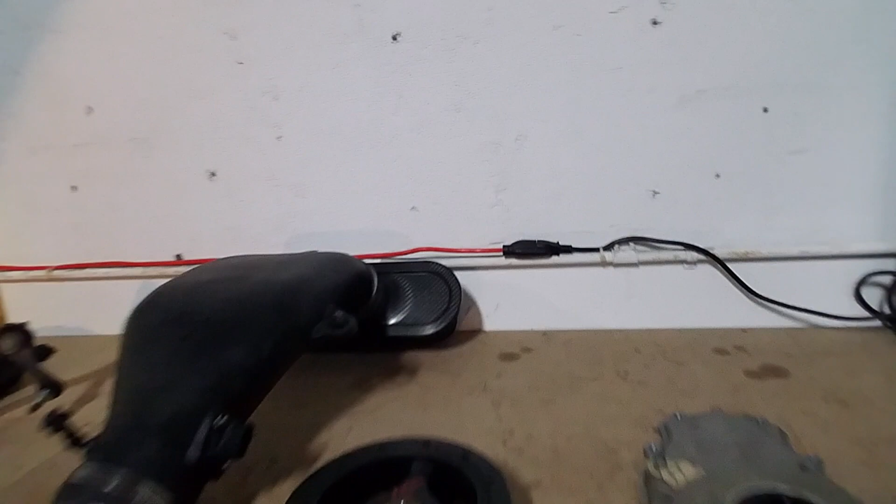I don't know how far I'm going to get. I mean, probably going to be at least a couple hours to get all this stuff back together. We'll kind of see as I'm getting tired. I don't want to force the project and mess something up and get sloppy, so I might just do a little work tonight and then come back tomorrow after work and finish everything up. So let's go ahead and get started.

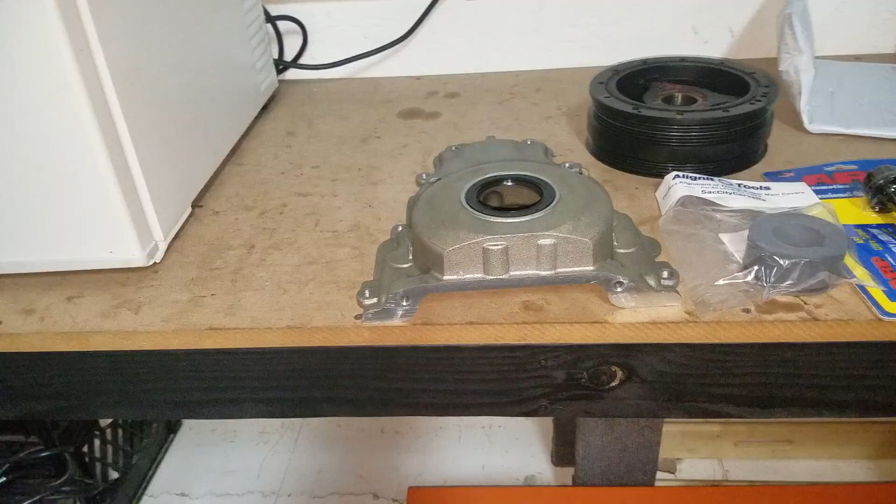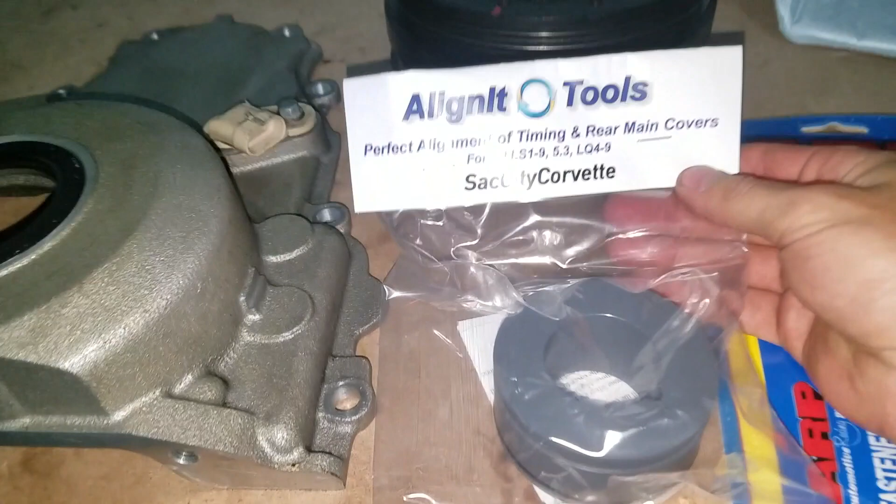Alright, so here's all the parts basically we need for the job. We got a new seal, we got an ARP bolt, and we got the alignment tool. I got some questions about where I got this, so here's the name of it and where it came from. And basically this is going to go onto the crank snout, and then I'm going to put the timing

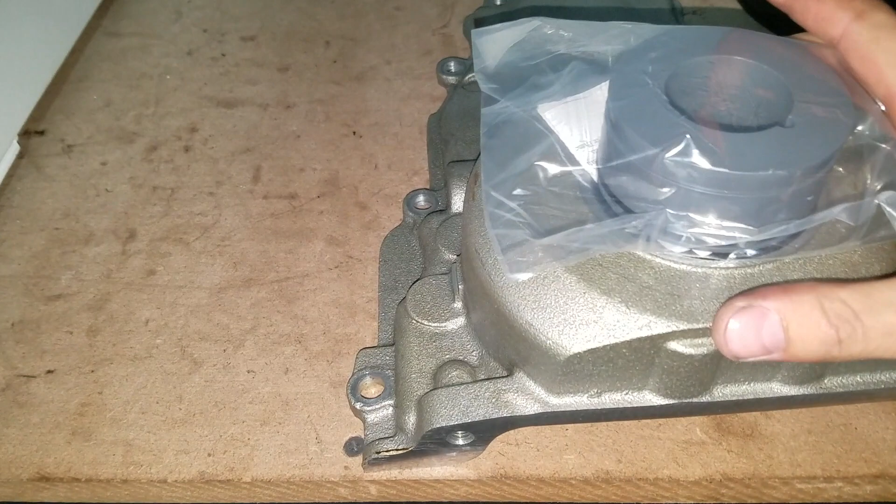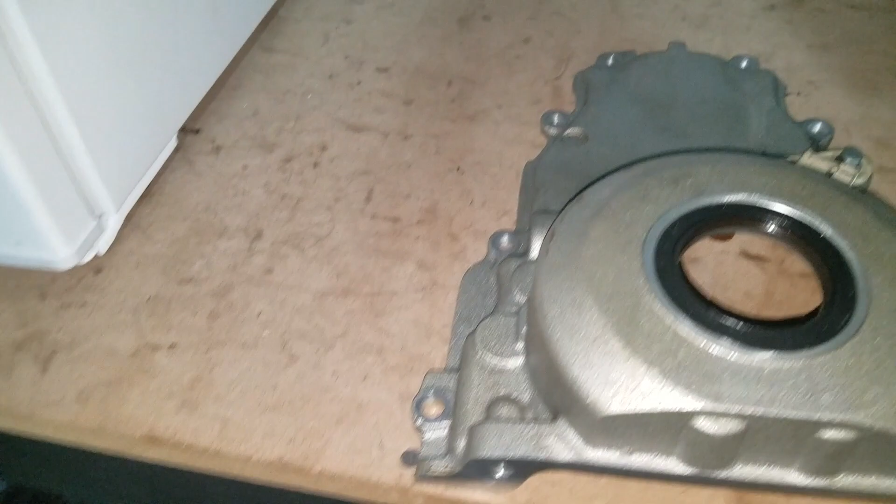cover on, and that's going to center this relative to the crank position, and then tighten these bolts down, torque it, and then that will be set centered, so then when we bolt the balancer up, it's going to drop right in and be centered on the seal. So that's the trick with that.

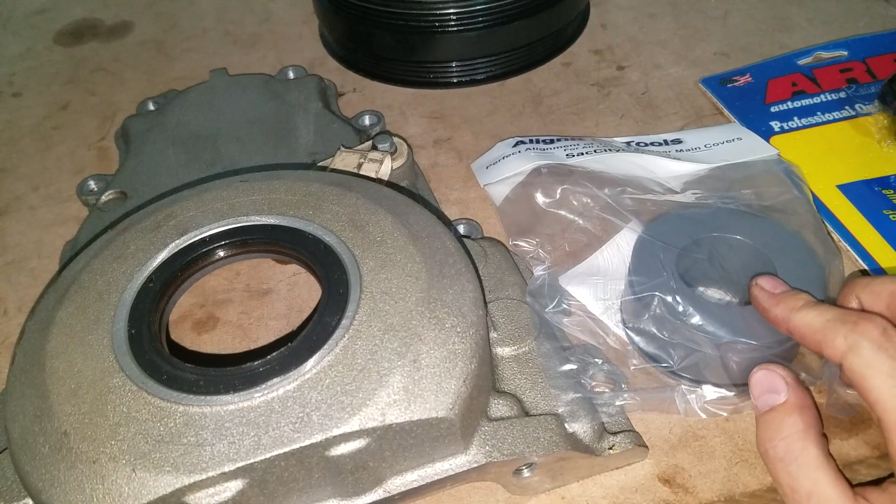Obviously I didn't do that last time. I just thought the bolt holes were close enough on alignment and it would kind of center itself as resting on the oil pan, but obviously that's not the case with these LS motors. You got to be real critical of your tolerances and how you put this together. So this is definitely the tool for the trade here, and you want to make sure you got this prior to doing a front main seal on one of these cars.

And then the other thing too is, before you take this apart, you want to make sure you mark your balancer if you're going to be reusing it. This balancer should be fine. It only has like 20,000 miles on it, so I don't see any need to replace it, and I hope I don't regret that decision. But anyway, so this is marked on the crank snout, and then the alignment here.

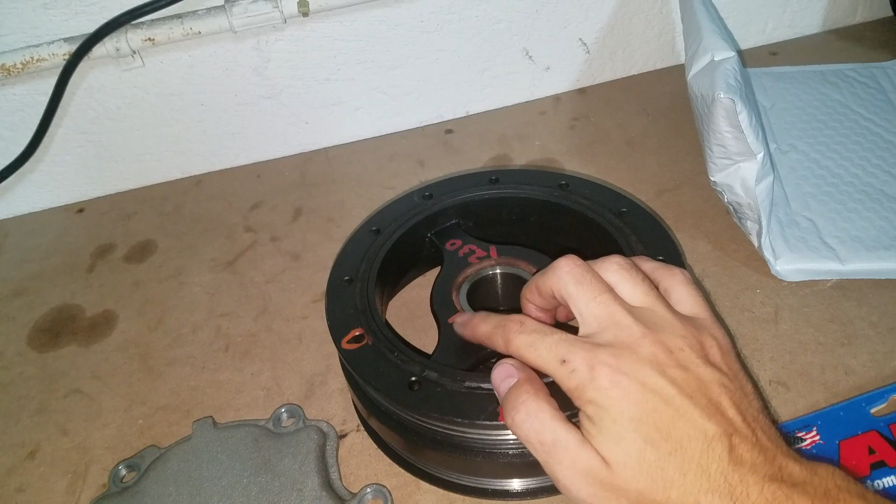These are some old alignments from when I torqued it last time, my 0 point, my 230 degree with the stock bolt. So that was the alignment mark, and then one is on the snout, because this is a balanced harmonic balancer. You can see it has holes drilled in here, and it's weighted with the rotating mass of the engine, so the crank and everything like that.

If you replace it with an aftermarket that's a zero balance dampener, you could just bolt it up in any position, doesn't matter, because it doesn't have offset mass. But this one does, and it'll throw the engine out of balance and could wear out your mains or your rod bearings, stuff like that, a lot faster if the engine is vibrating at a harmonic rate, and it'll just wear those bearings out.

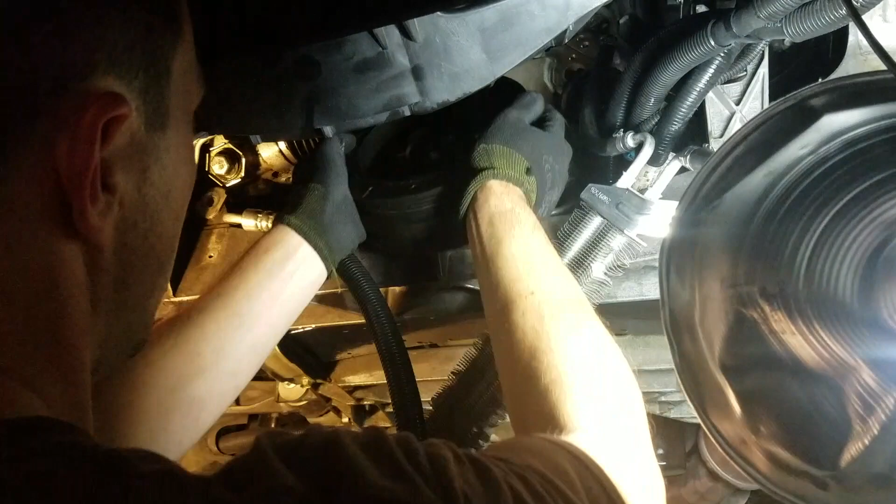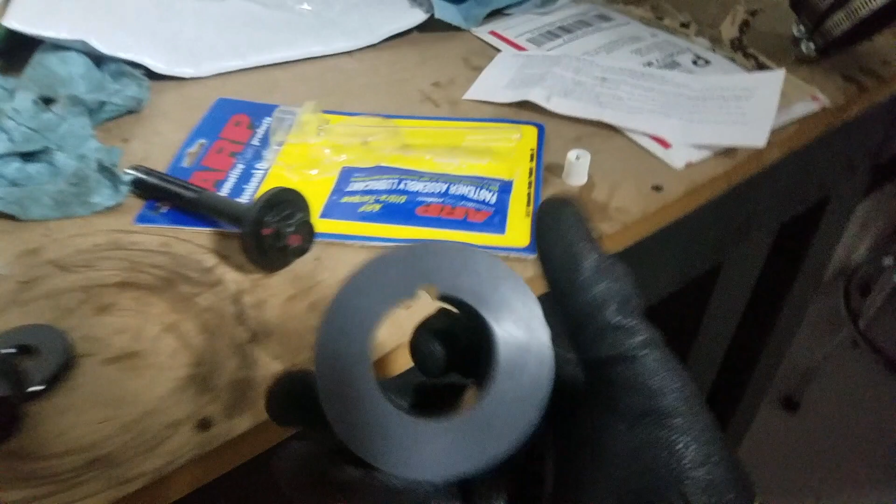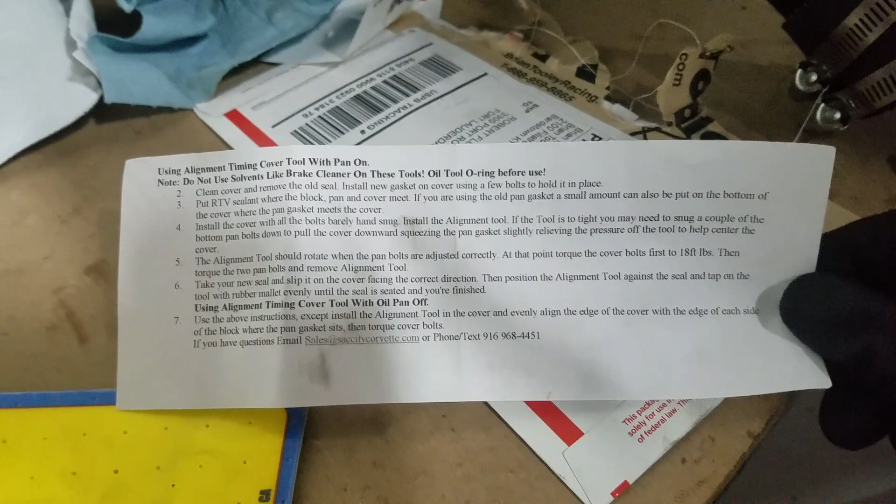So we followed the procedure with the alignment tool, put this on the crank snout, then slip the timing cover over it, and then they give you a little step-by-step how to do it. So you just put the bolts hand tight in the timing cover, and then you tighten the pan bolts on the bottom to kind of align this. And then when this spins, not so much freely, but you could turn it by hand, that means you got

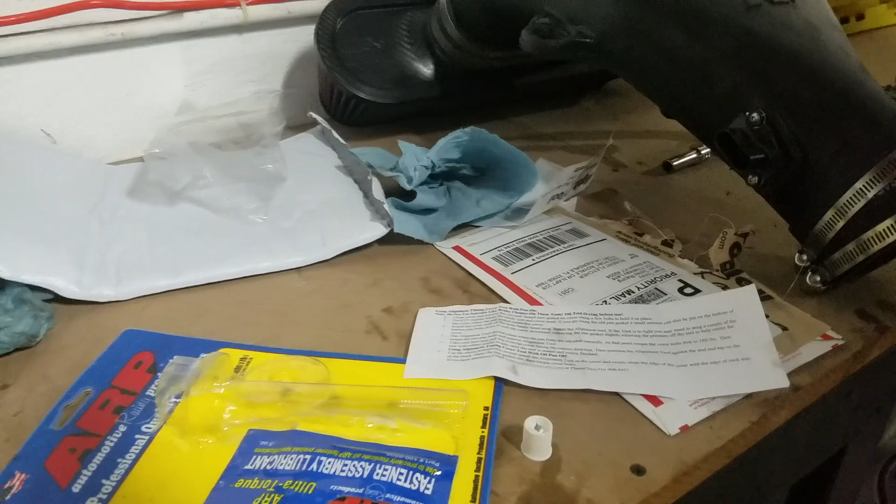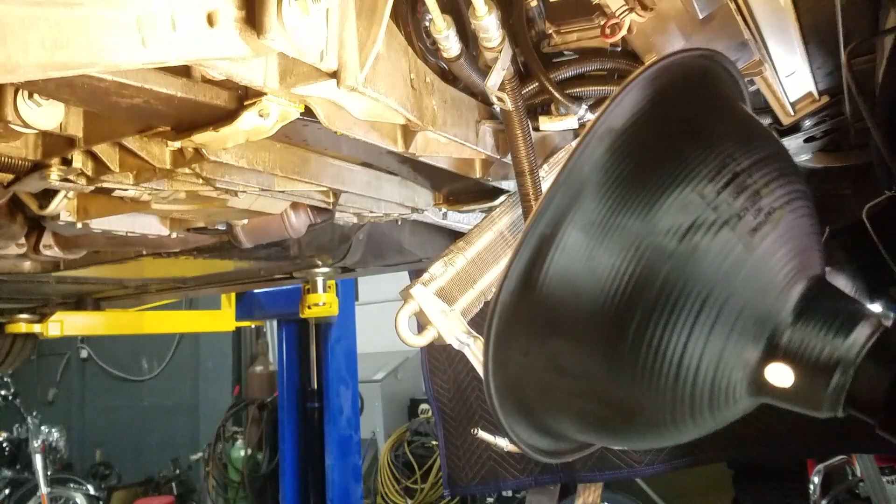the alignment correct. And then you go ahead and torque your cover bolts down to 18 foot-pounds, and then torque your pan bolts down. But you're not going to be able to get a torque wrench in there unless you have the subframe out. So I just cranked down on them with the 10 millimeter combo wrench, and then I actually used the torque wrench on the cover bolts for the timing set. So we'll move on to the next thing here.

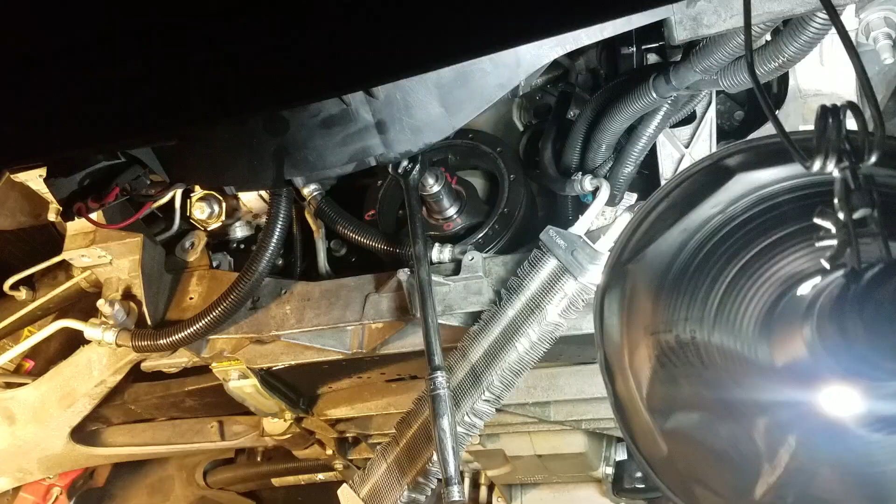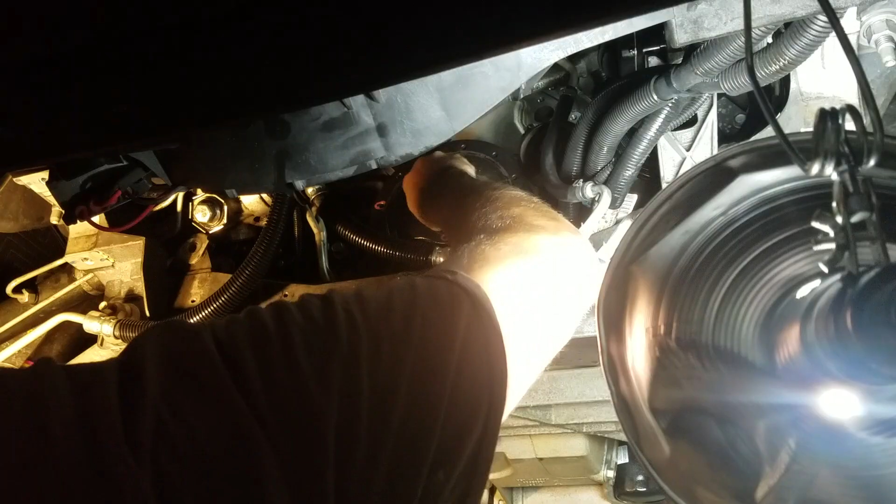All right, so we got the balancer seated right now. Give you a little tip I just kind of figured out. Last time I used a factory GM bolt, a new one, because it's torque to yield, right? But this time I went with the ARP, just as I was like, oh, well, what if I have to do this again? I might as well buy a bolt that I could reuse, even though it's $40.

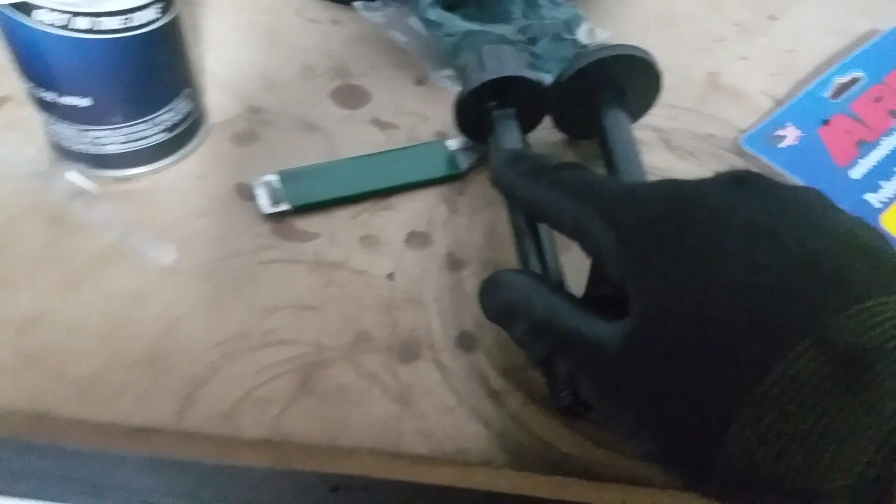But anyway, let me show you the stock bolt with the washer. As you can see here, the ARP bolt is just slightly longer, maybe by like a ½ inch, but they give you an additional washer, which is gonna, as you can see here, make up for that gap. But I think the reason why they do it a little longer like that is so that you can use this as a jacking bolt to walk the harmonic balancer onto the crank snout.

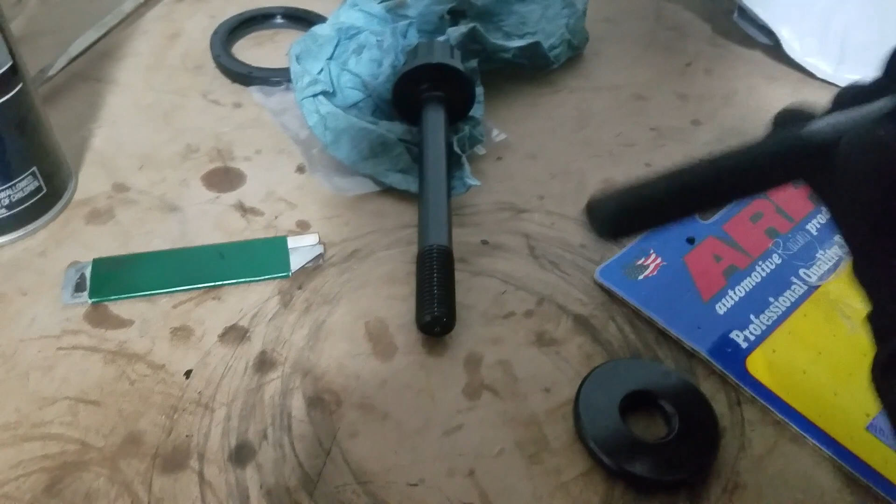So if you just put the harmonic balancer in place and then try and catch the thread with this bolt to like walk it in, it's not going to catch. You actually would have to like tap it with a mallet and kind of work it and pray that it's even and doesn't get cocked. And then when you get it on far enough, you could start with the factory bolt to run it in.

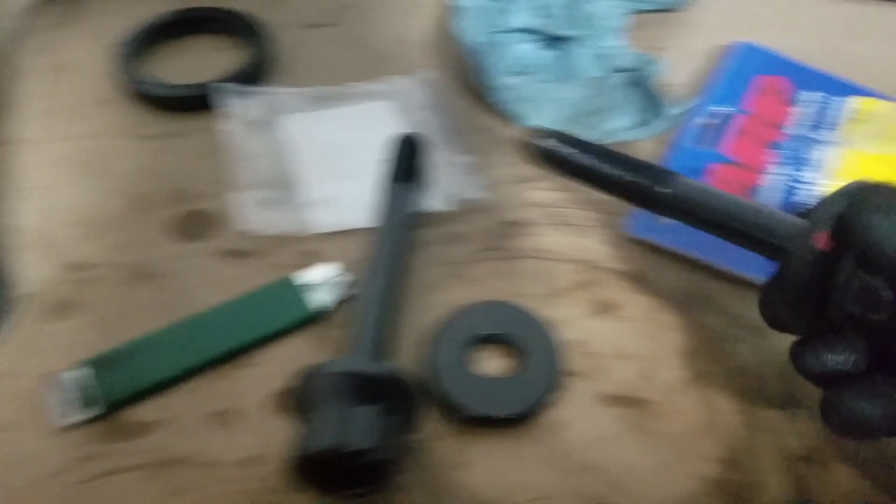But the way this bolt is, since it's a little longer, you just leave the washer out, you put this bolt in, and then you can catch the threads immediately and start walking it in. Now, I just use that to get started, and then I use the factory bolt to seat it because I didn't want to put any kind of additional stress on this bolt or anything like that. So I figured, let me use this as the tool, the jacking bolt, to walk it on. And then when I'm going to put this together for final torque and everything like that, I'll put the ARP

bolt on. And then the final thing you got to do is, you'll see here, they got a depth measurement for how far the balancer has to be seated on the crank snout. So you got a clearance of 0.094 to 0.176. So I just took the caliper, used a little depth gauge in the bottom here and checked it, and I had 146. So I'm pretty much right in the middle of the range there.

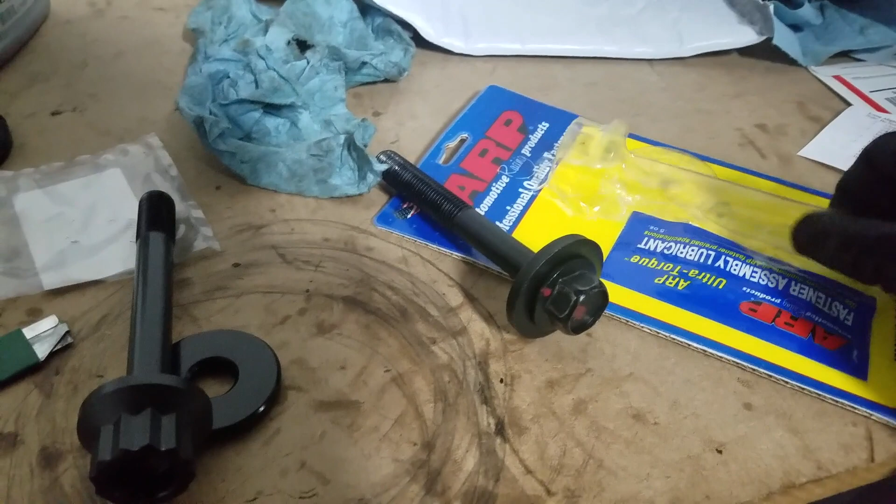So that just ensures that the balancer is properly seated and that you're not pulling torque on a cocked balancer that isn't even all the way on, because I guess that could happen. You could still torque against that. So now pretty much you're ready to put the bolt in. I'm going to use the ARP assembly lube, hit it on the threads and underside of the bolt head, and then I'm going to torque that to, I believe the spec on it from ARP's website is 235, 225, something like that. I'll double check it, and then we'll set the torque wrench up and crank that baby down.

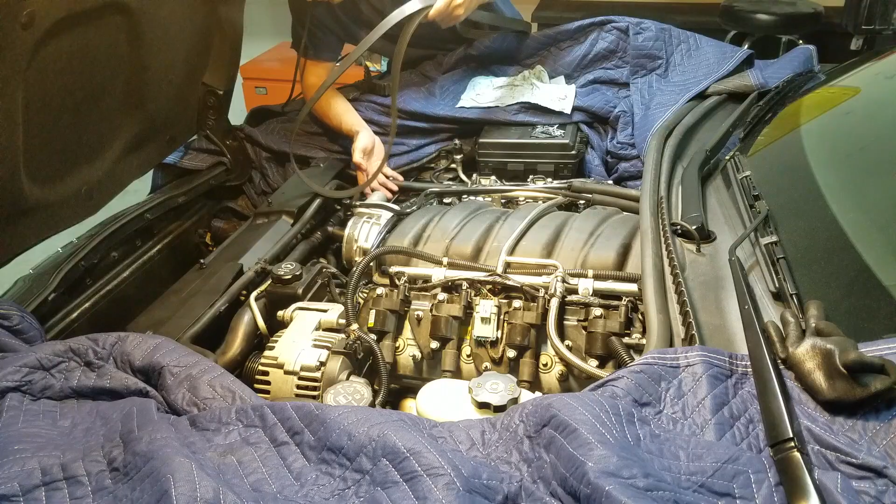So here's where we're at with the car. It's the following day from when I started shooting this video. Just kind of ran out of gas that night. I stayed here until like 2 in the morning, trying to get as far as I could with the car. A lot of things were just fighting me, and I really didn't get to film a lot of it just because I was trying to kind of work by myself with it, and a little help from my buddy when he can free up a hand. And so I'll show you guys where we're at now.

Alright, so you can see here we got the steering rack back in, water pump back on, the power steering pump assembly bolted back up to the head, alternator back on, the drive belt, all the hoses are reconnected, the wheels are on, and pretty much I think that kind of buttons it up top side. I just got to put the intake on, fill it with fluids. I'm just going to lift the car up and double check everything under there, that all the fittings are reconnected. I think I still have to tighten up the sway bar. I think I just put the bolts in loose last night. So we'll check in on all that, and we'll keep going from there. So hopefully we'll be finished up with this pretty soon.

I'm just going to finish off with some brake clean. That way everything evaporates and dries under there, and we're starting fresh, and then we can identify any further leaks we got with the project.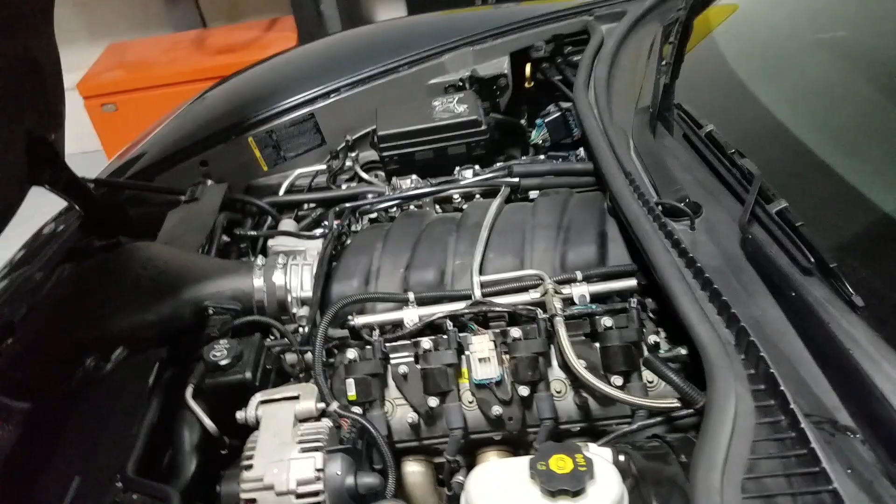So if the seal leaks again, stay tuned. You'll probably find this box and all my tools listed on Craigslist, because I'm probably just gonna quit. But no, just kidding there. We're not gonna give up on this. If something else goes wrong with it, I'll stick with it and get it fixed, get this car running.

So just a little bit of a minor setback. Well, that was a pretty big setback. I mean, I had to pull like half the car apart to get to the oil seal. But hey, look, it's back together. It's 2 days later. It's not that big of a deal. A couple hours each night after work in the garage, and knocked it out. And hopefully this will be the last of the problems with this, and we'll move forward with the project and get her done. You never know, working on stuff like this, there's always something that's kind of bound to go wrong, but hopefully it all works out.

I'm looking forward to driving the car and getting some seat time in it, so stay tuned for the next video, get it finished up, and start working on the tune.